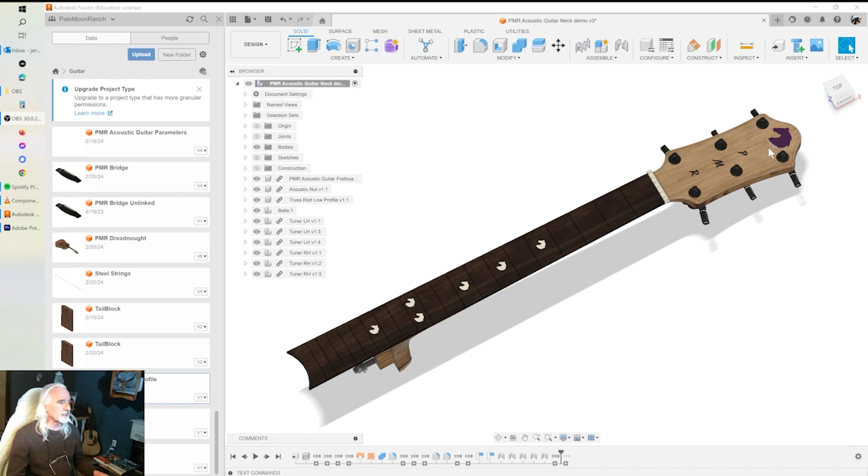In this part, we are going to finish up the neck, and that's going to include designing the headstock veneer, this layer on top. We're going to then move on to getting the heel cap put on to the heel transition. After that, we're going to sketch and then cut in the slot where the truss rod will go. Let's turn that truss rod off so we can see. So we're going to cut this so that we'll be able to bring in the truss rod and joint it into that slot.

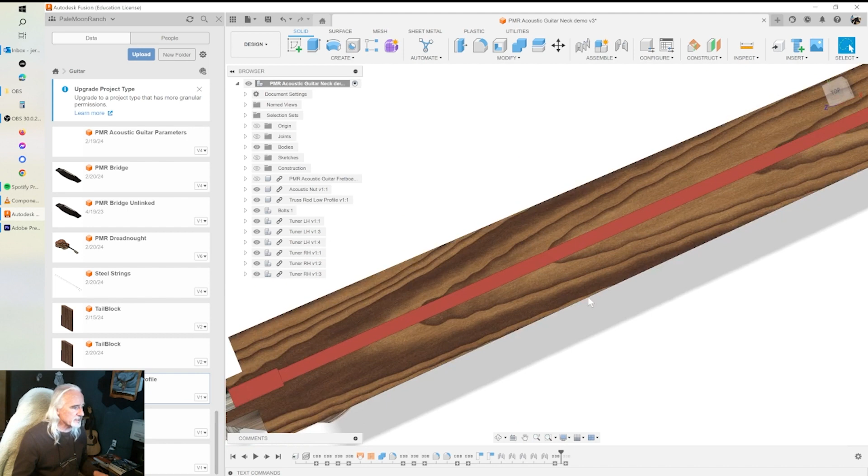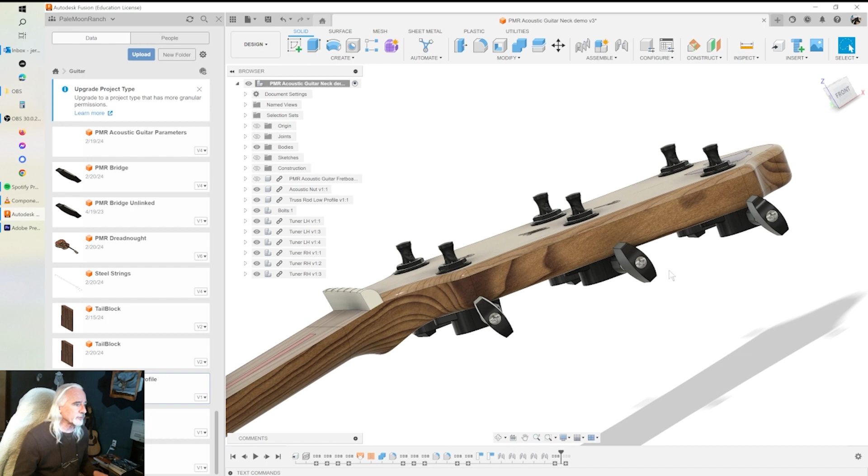Once we have that, we're going to bring in most of our components. By that I mean the hanger bolts, the washers and the nuts, the truss rod and the nut, and we're going to get those all assembled into the neck. And then lastly, we're going to bring in the tuners and get those installed into the neck. Once we have that all done, the neck will be done and we'll move on to the body. So let's get started.

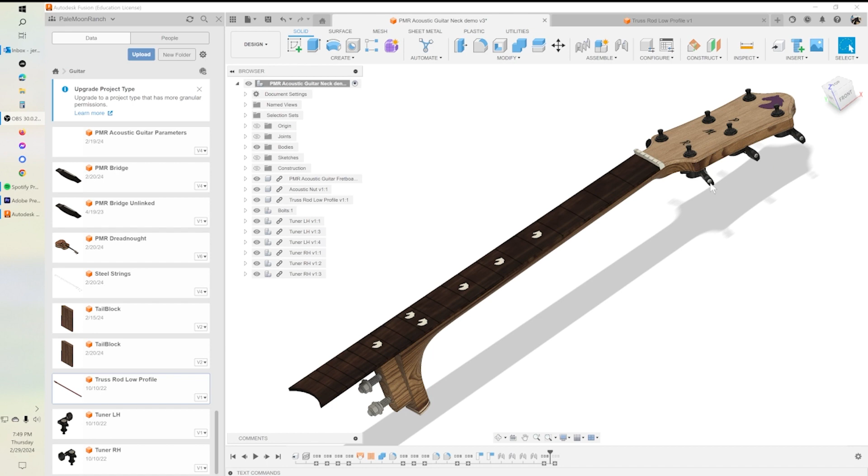First thing we're going to do is design our headstock veneer, this thin layer that goes up here. Let's back our timeline up to that and expand that. The first thing we're going to do is extrude it.

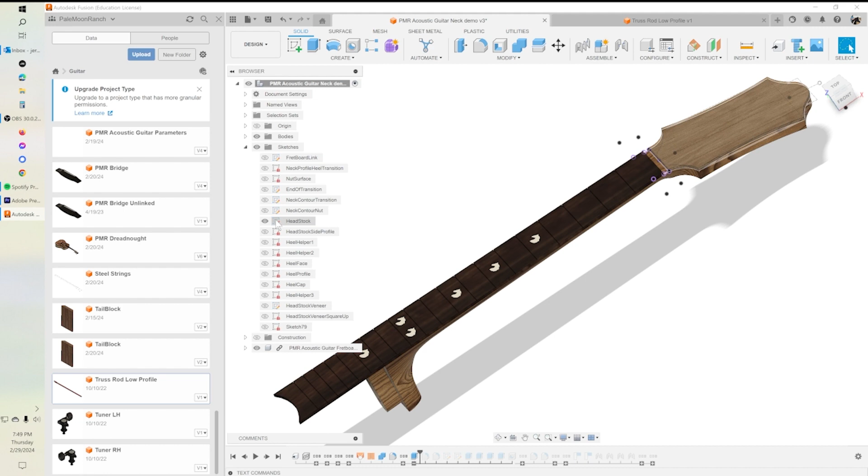So we're going to turn on our sketches and turn on our headstock sketch. And then we're going to extrude the outline of that up to where the nut goes. So that looks like this.

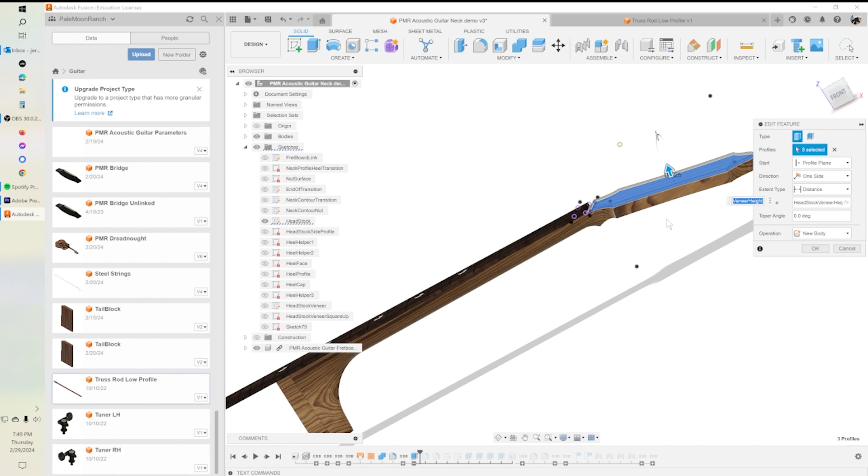And I have a parameter in here, headstock veneer height, set to 1/8 of an inch, 0.125. And we'll go to our bodies and turn that on. It is on, okay.

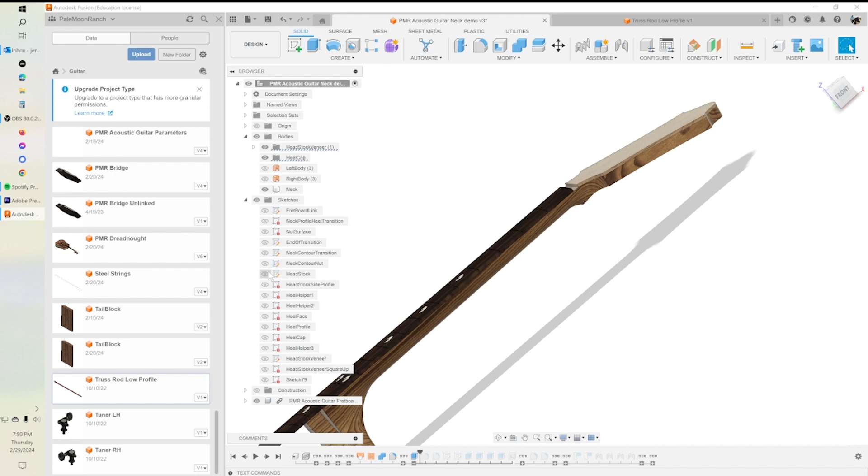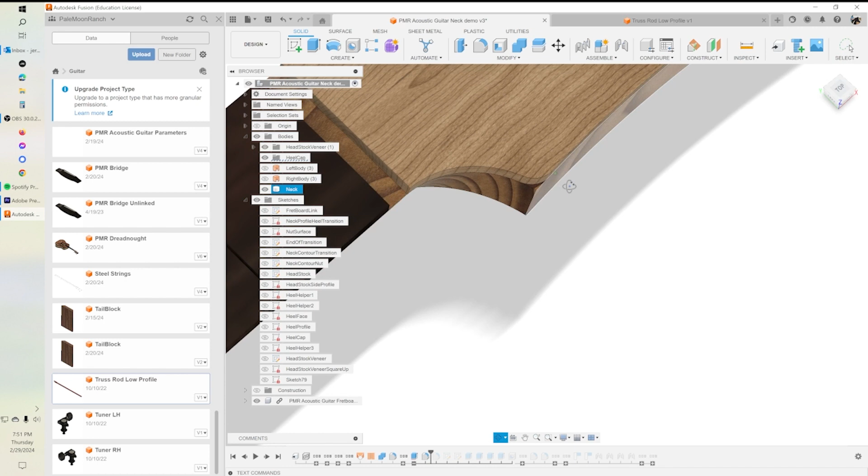Now we'll turn off our headstock sketch. Then we're going to do a couple of fillets. The first one rounds this edge here, and here, and here, and here. The second one is going to then round or fillet the top edge. We're going to fillet the bottom of this in just a little bit here.

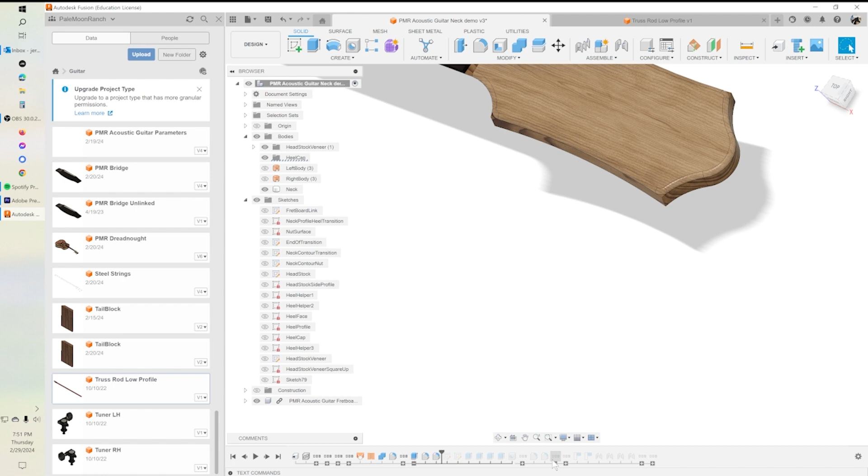So once we have that, then we need to draw our holes and our inlays, if you want to do inlays. Now, everybody's headstock is going to be a little bit different, so it's hard for me to tell you exactly how to do yours. I can tell you just roughly what I did.

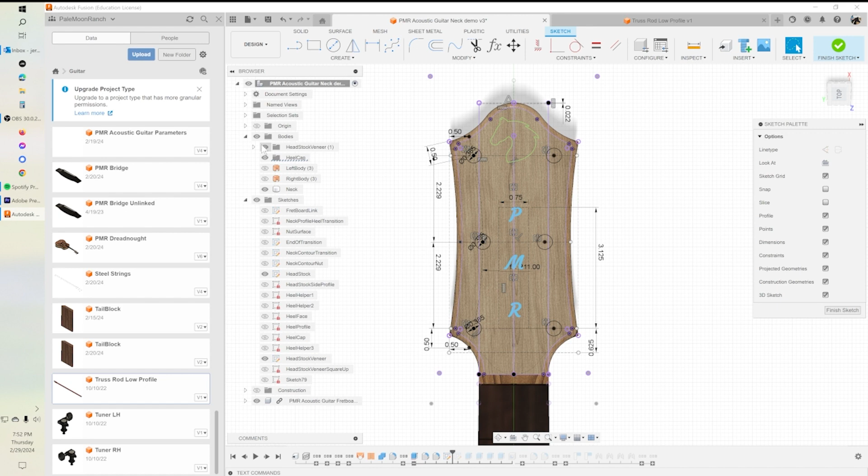Okay, so I came in here and I projected in, let's go back to that headstock sketch, turn that on, and I projected in my outline. Let's turn the body off for a minute. So I projected in this line here, not the line, but just the points - this point, this point, this point, this point, and this point. And I projected in part of our construction here.

Essentially, what it comes down to is that I created another arc here at the same radius as this outside arc, and I dimensioned it in 1/2 inch. And then I dimensioned up 1/2 inch from this point here to start my first hole. Then I just evenly spaced my holes and had them set in a 1/2 inch.

My holes are just over 3/8, a little bit bigger than the tuners, which have a 3/8 inch diameter. So these are just a little bit bigger for tolerance, 0.01.

And then once I had that, I just mirrored it over to the other side using that projected in line that I used right there. So I mirrored the opposite holes the same.

Then I brought in my SVG of my horse head, and then I just created a text box here and put in my PMR initials for Pale Moon Ranch. So that's just kind of an overview, because your design isn't going to look like my design necessarily. Almost certainly not.

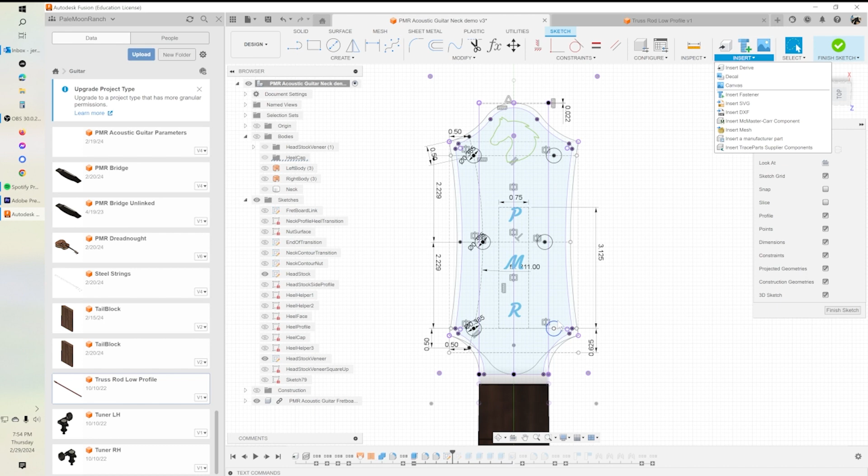Hopefully that gives you enough information. You basically just need to define where your tuners are going to go, create a hole that's slightly bigger than the tuner's diameter. They're all going to be pretty much 3/8, so 0.385 is a good number to work with there. And then put in any inlays you want.

Then once you have that, turn the bodies back on.

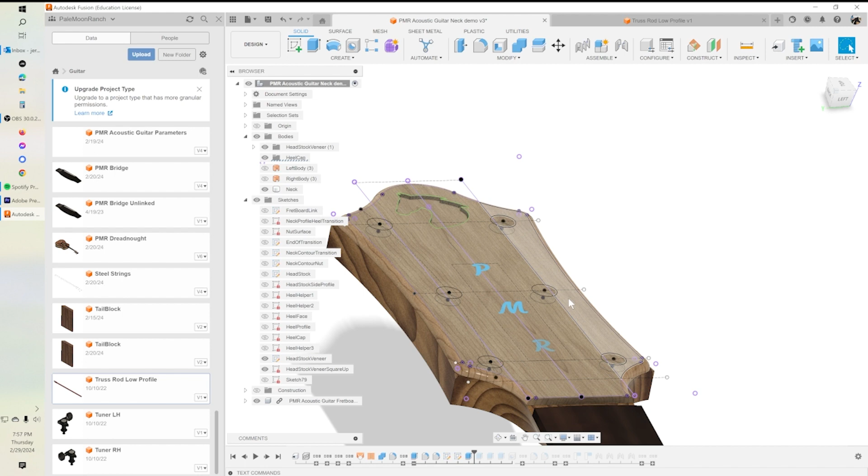So the next thing I did was cut in my horse head, and then I projected it back up with a new body for the inlay. I just created a purple paint—not sure what material I used, I used some material and then just colored it purple.

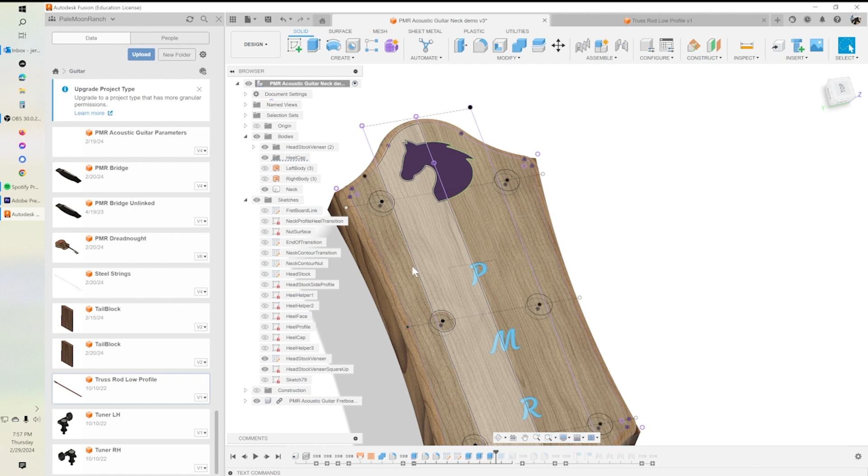Next thing I do is cut in the PMR, turn off the sketches, and again project it back up to fill it in. That's all just visual.

Then I'm going to cut my holes in. I'm just going to select my 6 holes and set my hole type to simple, hole tap type to simple, and drill point to flat, because I'm going to use my 3/8 inch or 1/4 inch flat end mill to cut those.

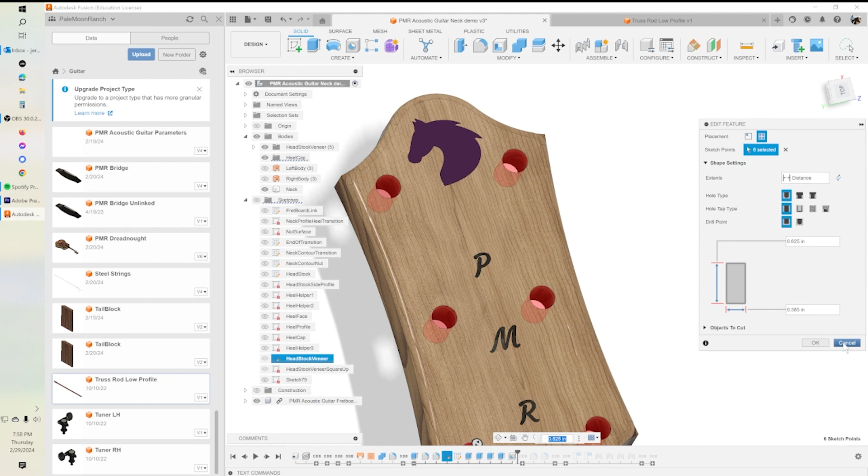And that's it for the headstock veneer.

Next thing we're going to do is create our heel cap on the bottom here. I did it as a 3-part thing because I wanted to create a lamination of two different woods, with maple, then walnut, then maple.

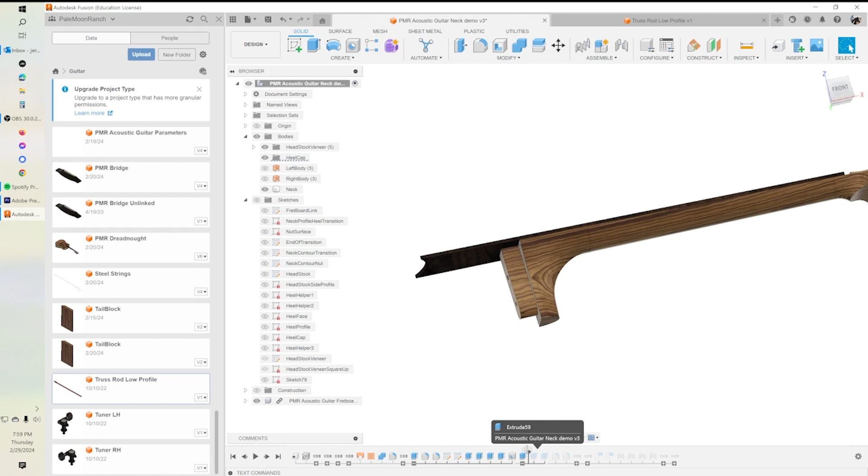So all I did was select this surface and extrude it 1/16 of an inch, and made that material maple. Then I extruded each one as a new body—another 1/16 inch of walnut as a new body, and another 1/16 inch of maple.

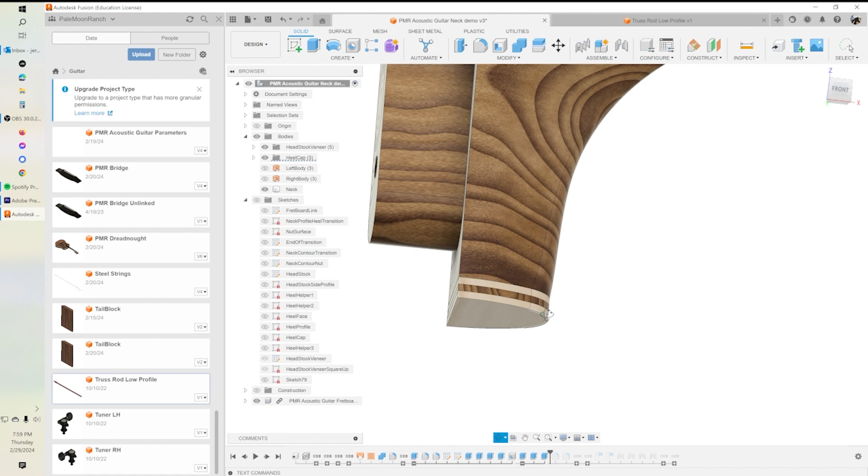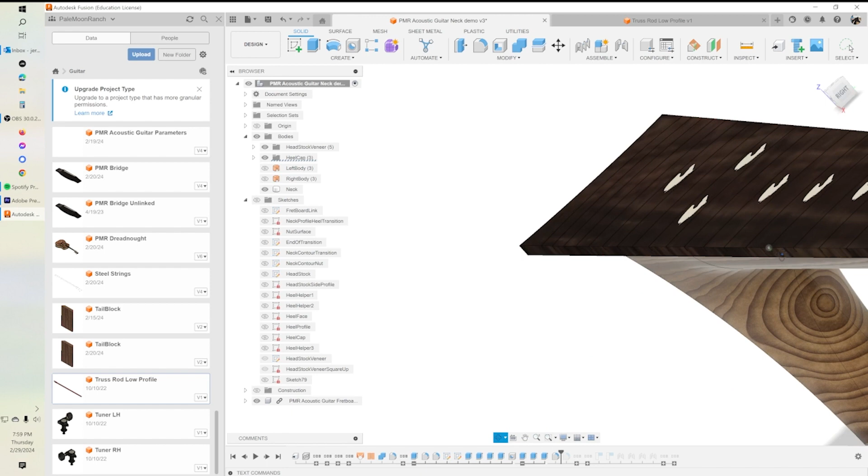Then I came back in and added a couple more fillets to match this up. The first one is to round over these corner edges to match the veneer, and then I did another one to round off the bottom.

Now, I know in part 2 we rounded this off, but that has gotten moved to here, so now we're just going to select this edge here and round it all the way around through the volute and around that bottom edge.

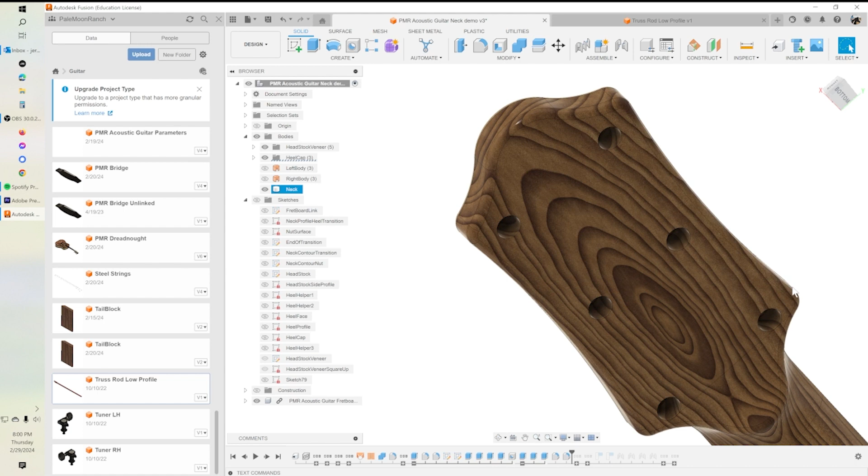Okay, so next thing we're going to do is cut in a slot for our truss rod. I'm going to turn off the fretboard—the truss rod is going to sit right in here, so we need to put in a slot for it. The truss rod I use is the low profile truss rod from StewMac.

So I created this model of it. It's not a working model—it doesn't actually have any function in here. It's simply here to model it in the guitar, an aesthetic thing just to show that it's there.

It's on my GrabCAD account, so you can go pull this down—I'll put a link to my GrabCAD. I have several things I modeled that I use in this guitar, like the nut, the bridge, the saddle, the strings, the frets, this truss rod. I'm not sure what else I might have on there as a GrabCAD item.

And these things are just to make the model complete for visual effect, really. So what we need to create a slot for this—as you can see, this part of the body is a different dimension than this. So what we need to do is cut in a rectangular block that matches this.

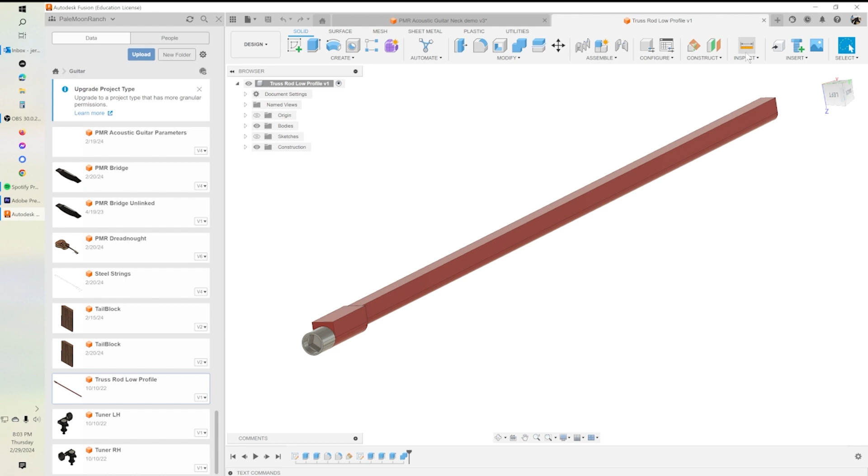Then the other dimension we need is this dimension across here, which is 1/4 of an inch. And we need the length of this section of the body, so we're going to grab this and go to here—that's 12.75. So we have all those numbers.

So we'll go back over here, and we're going to create a sketch on this plane.

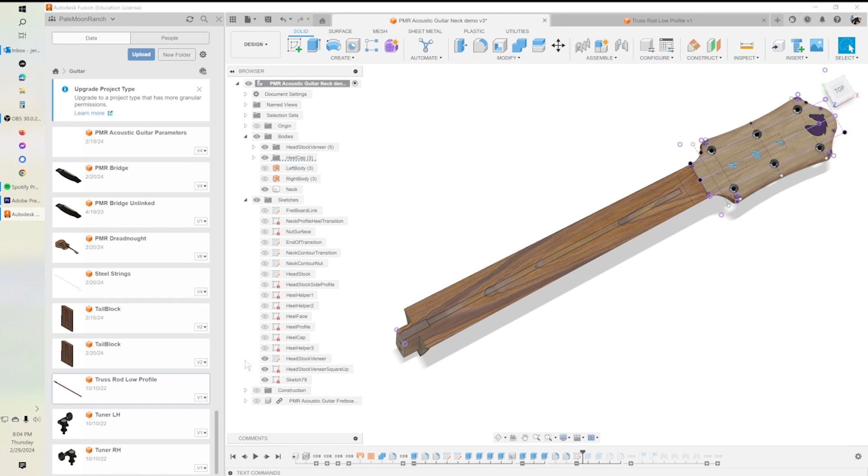So we're going to create a rectangle on the end here that's coincident to this end and midpoint, that is 3/8 wide and 1 3/8 inch deep.

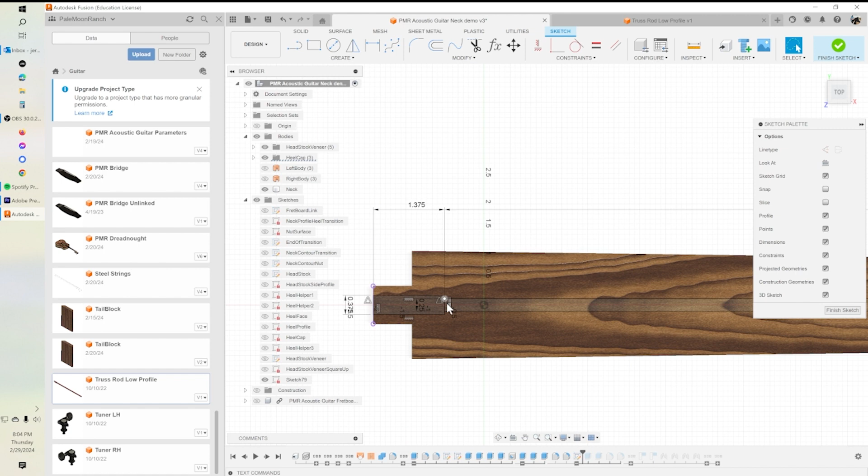Then we're going to create a 1/4 inch wide by 12.75 slot that goes directly behind it, and it's going to be constrained to the midpoint again of the neck.

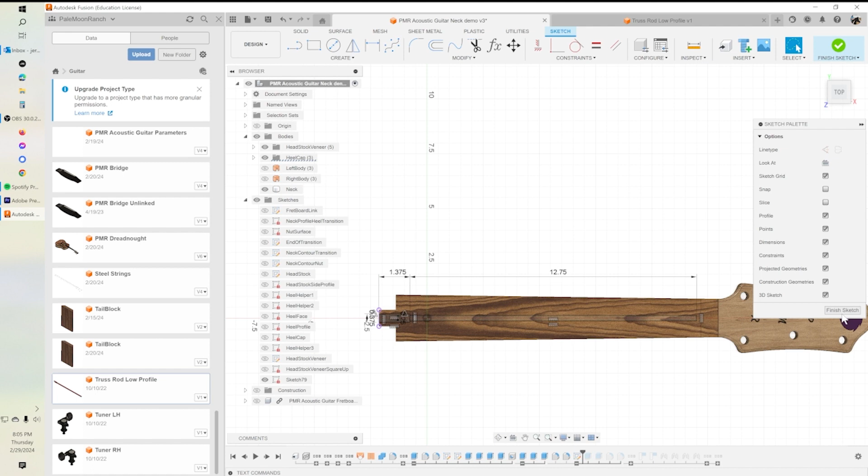You see all the parallel, horizontal, and vertical constraints, and that's all there is. So once we have that sketch, we're going to extrude that. First this one.

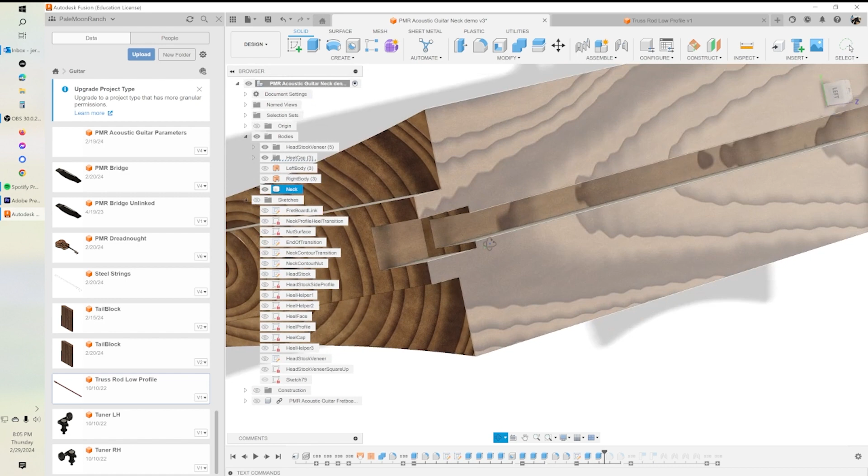Then we're going to extrude the other channel. Go ahead and turn off our sketch so you can see that. And then we want to fillet the bottom so it matches the curvature of the truss rod. So we're going to fillet this one and then fillet this one. And there we have it.

So in a little while we'll come in and bring in that truss rod, and we'll create a joint to set it into that slot.

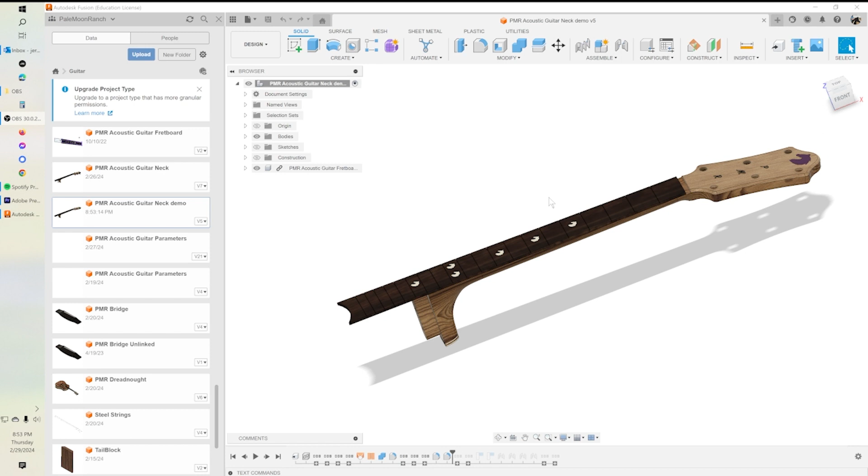Another way to cut that truss rod slot, if you actually have a model of the truss like I do here, would be to simply bring that truss rod in. Let's grab that. Bring it in as a component here.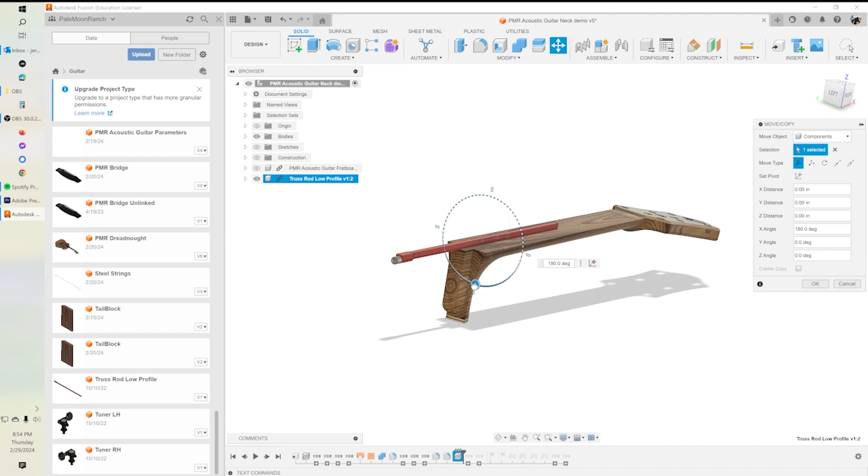And then move it into place carefully, make sure it's exactly aligned. So let's flip this over 180 degrees right there. And then if we zoom in here... let's say okay and zoom in.

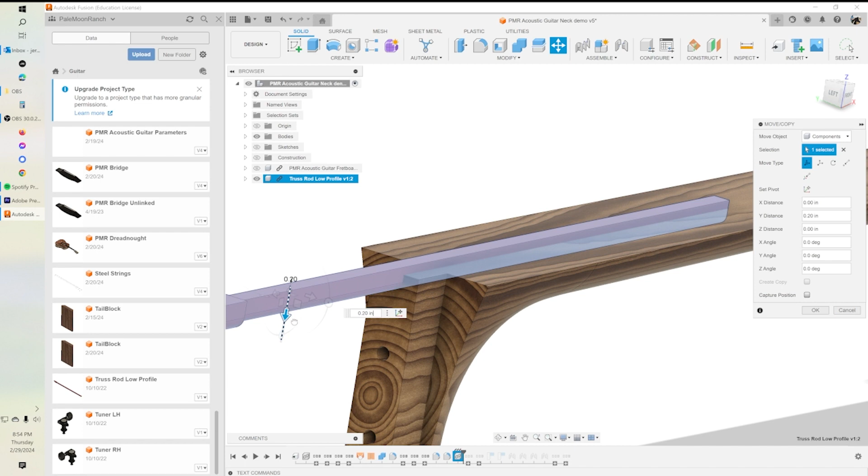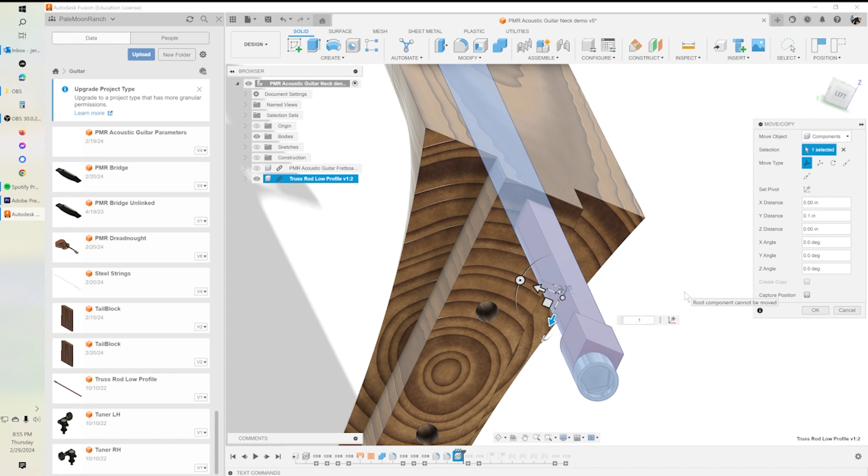It's a little bit too much, so let's go back to move, and we need to come back up just a hair, maybe 0.1, actually 0.01. There, maybe that did it. Okay, we're there, it looks flush with the top.

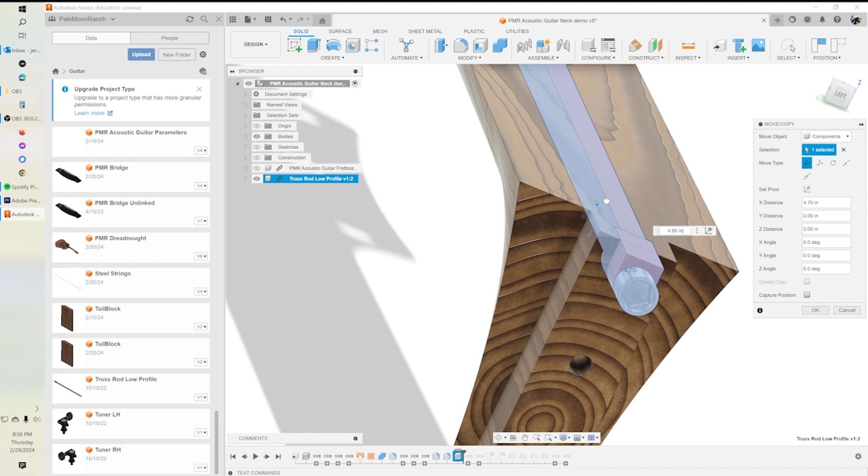And then we're going to move it back until it's flush with the end. Let's get this thing turned around so we can see. And it needs to go back still. Let's say 6, what is it? 1, 2. There, and that looks pretty good, huh?

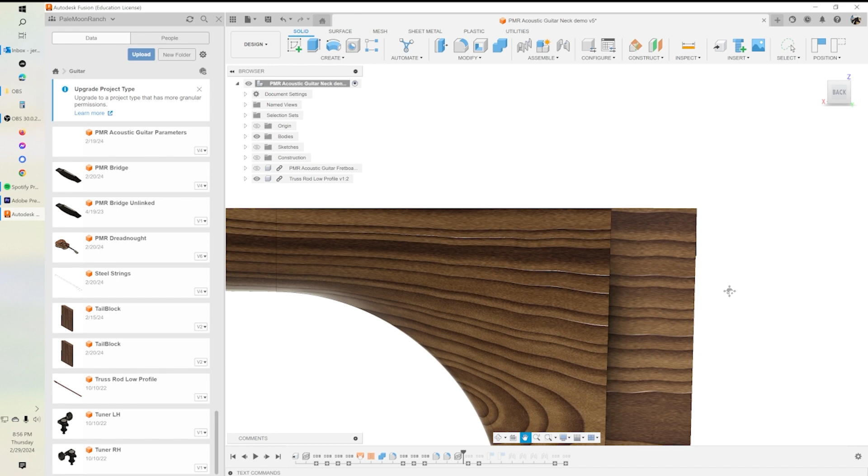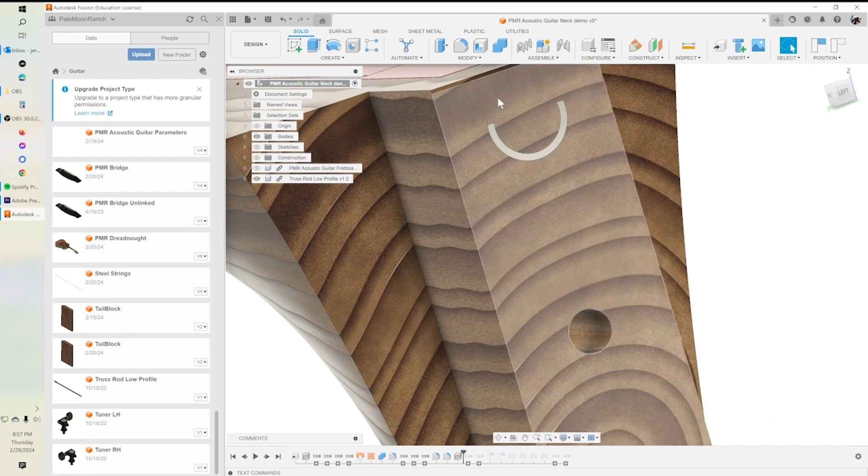And we can tell, if we can actually see it, that it's there. Maybe it's just a little bit too far, so we're going to go back to move again and bring it out just a tiny bit. The reason it's like this is because, remember, we've got an angled neck here. So we're going to bring it out just a little bit more to take care of that, because we need to cut through the whole thing.

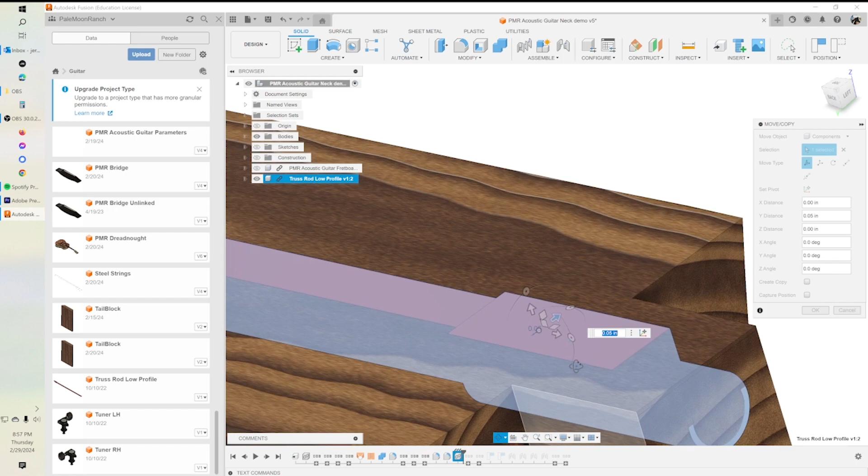So let's get up here and grab this, and we want to come out. We're going to say 0.05, and that'll do it.

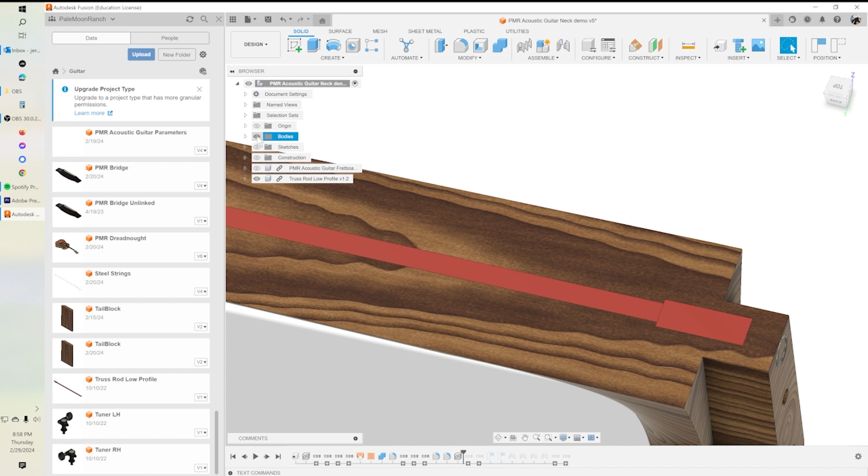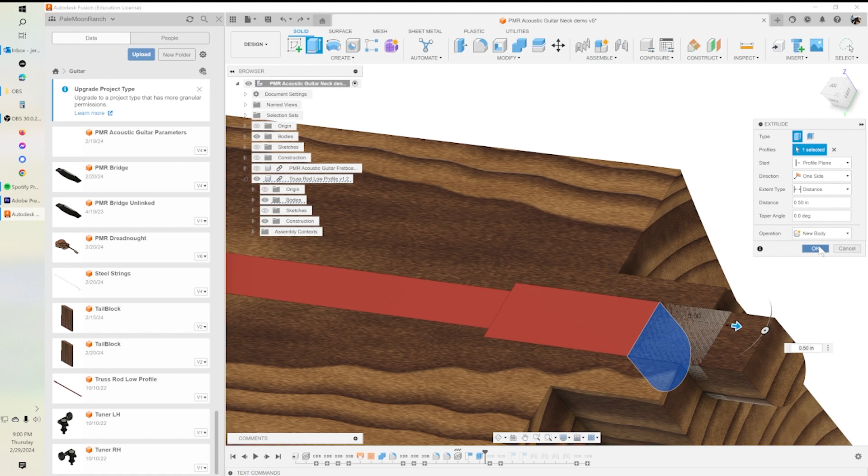All right, so then what we're going to do is extrude this out. I'm going to turn off the neck bodies for a minute, just like that. Extrude it, and we're going to say new body. And turn on our bodies over here. We're going to say new body. Say OK. Okay, now let's see if this works.

Now we're going to do a combine, and we're going to select our target body. And our tool is going to be this, this, this. That's enough right there. And we're going to do a cut operation.

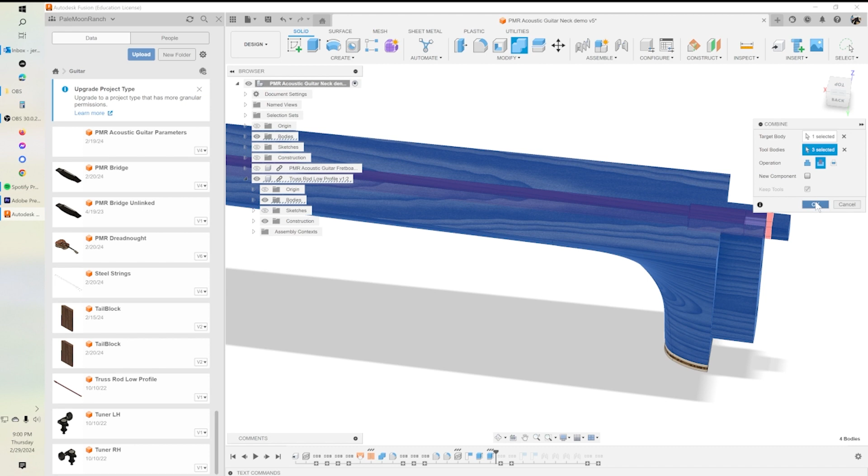Now if we turn off our truss and we turn off that body we created there, and that one, there we have our cut-in slot for the truss. So that's just another way of doing it.

Okay, we got that. Next thing we're going to do is bring in our components, starting with a hanger bolt and a washer, a lock washer, and we'll go ahead and create a rigid joint to put that onto the bolt.

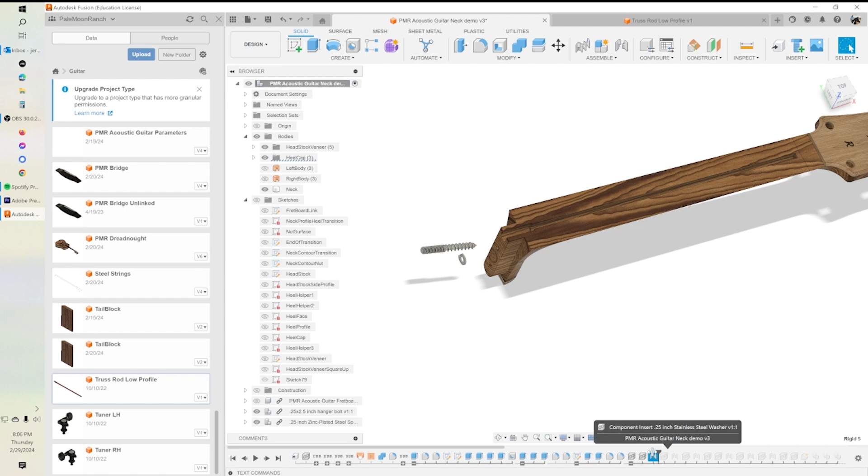I'm not going to do a tutorial on joints here. All of this—anybody that's done joints knows they're a pain in the butt, but...

Basically I'm going to take the center of that washer and do a joint to the center of the bolt, and then I'm going to offset it within the joint to bring it up on the neck there. So you can see the offset is 1/8 of an inch.

Then I'm going to bring in a flat washer, and I'm going to joint that onto there. And then I'm going to bring in a nut, and I'm going to put that on there with the joint.

Okay, and then I'm going to do that all over again for the second one. We'll just jump ahead here.

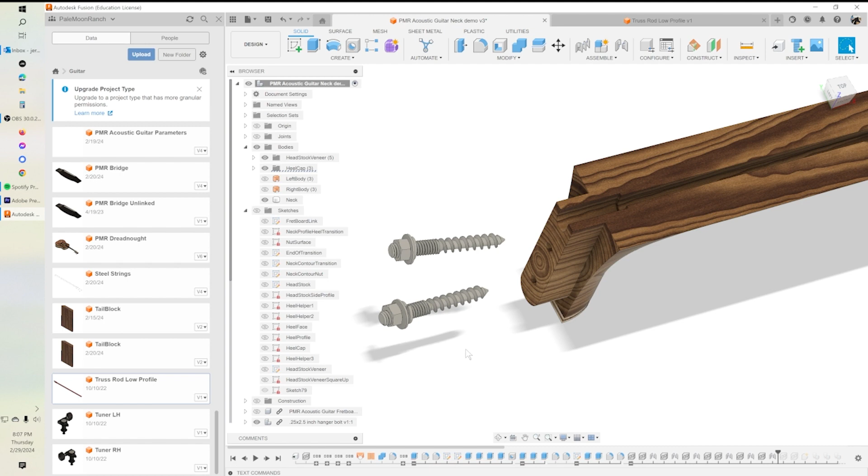And we have that. I should have explained earlier, the hanger bolt and the washers and nut

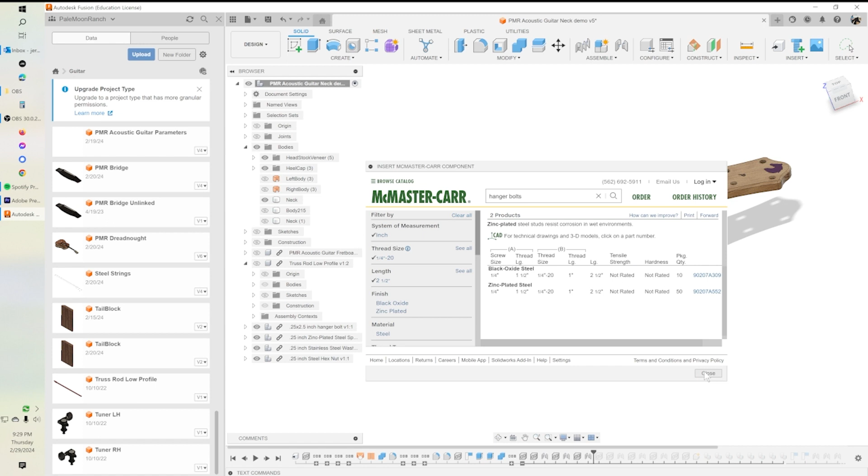Came from McMaster Carr. To get those, we go to Insert McMaster Carr Component. We're going to get this up and search for what we're looking for. Let's look for a hanger bolt. Hanger bolts right here.

We're going to choose, we want inch, steel wood screw threaded studs. So we're going to select that. We're going to choose 1/4-20s, and we want them 2.5 inch, and that narrows it down to what I want. And I want the zinc plated steel right here, 2.5 inch.

So I'm going to select that, and then that pops up this down here to where I can download the CAD for it. You can choose what you want here, and what we want is a 3D step file. So we'll select that and click download.

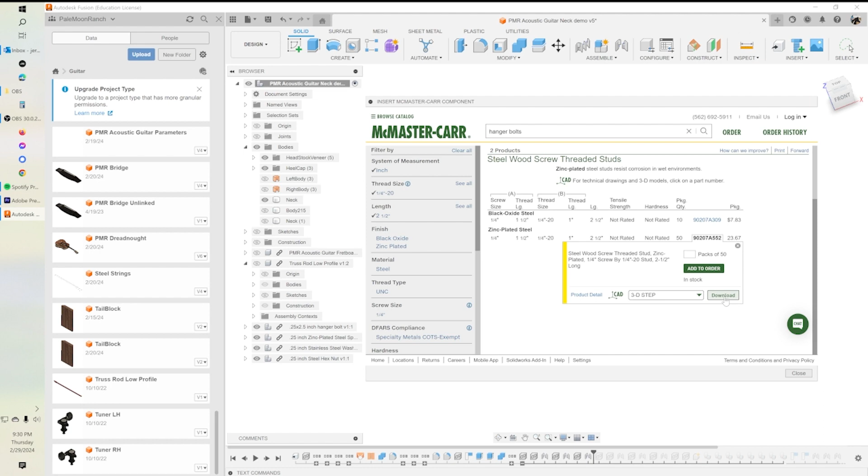Now bring it back into our model. Brings it in here, and then we can orient it and place it where we want to, and say OK and accept it. And it adds it down here as a component.

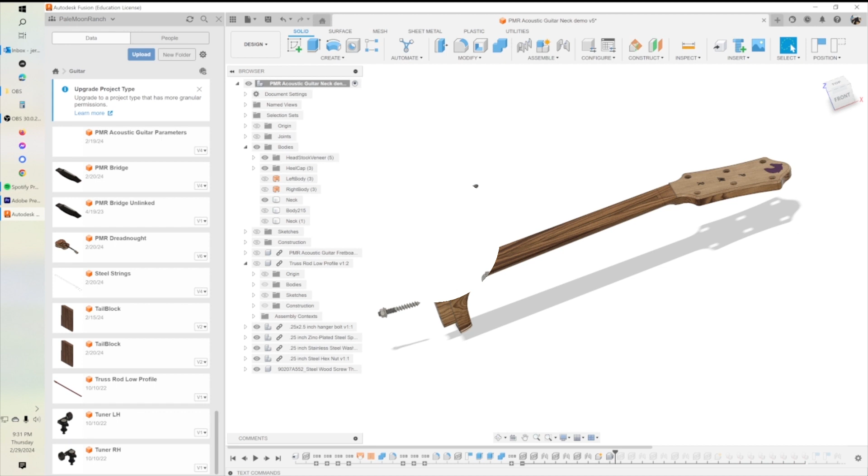Okay, just wanted to show that. And we'll join those to the neck here in a little bit. First, we're going to go ahead and bring in our truss rod and our nut.

So we've got our nut, and again, that nut is on my GrabCAD. You can go pull mine down for the purposes of modeling, and you can pull down my truss rod if you like. Of course, if you plan on using a different truss rod, you can design your own. I don't know of any other models out there you can pull down of a truss rod. Even a nut, I'm not sure you can find the nut.

Of course, these are dimensioned to the dimensions I chose. I believe this is 1 3/4 inch up here, and that nut is dimensioned for that. Sorry, it's 1.5 inches.

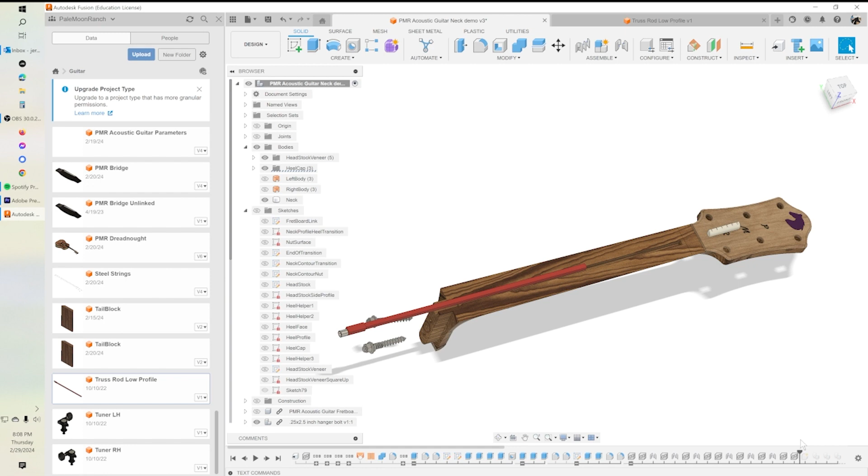Okay, so once we have those, I'm going to take a quick departure here. I've got all of these nuts and bolts here that I just pulled in. I want to organize them, so I'm going to create a component here and call it bolts, and then I'm going to cut and paste all of those nuts and bolts and put them into this component.

So that's what this is down here, is moving all those. I just want to be able to pull them in there just to organize them. Then I can kind of close this up and have less distraction, I guess, is what it comes down to.

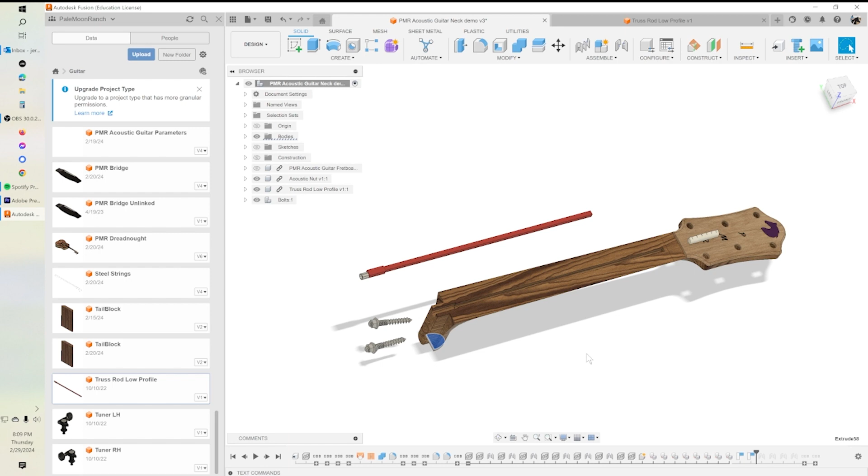Let's close down some of these groups to give us some room on the timeline. These two positions are just to get things moved so that I can get some joints on them. So I move that up there. Then I'm going to put a joint. Let's turn on our joints, actually.

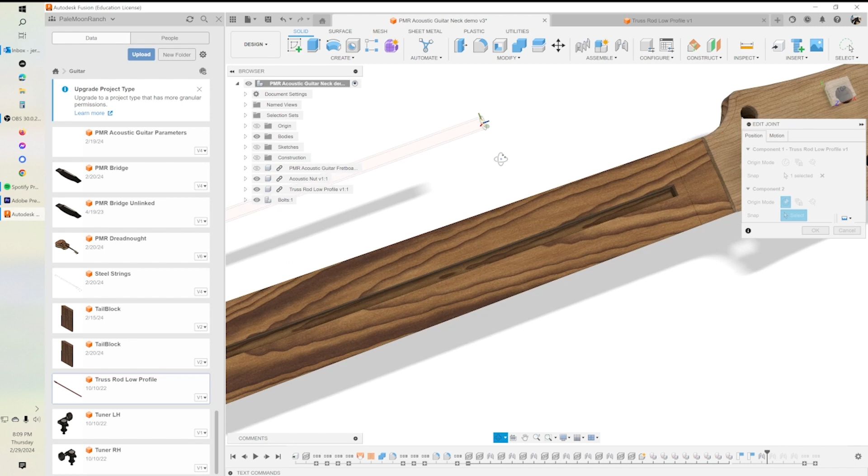Just a rigid joint, the face of this against the face of this. Undo this so you can see I chose the end of this, the center of it, and then for my other side I chose just the center here. Okay, and that dropped that in there and locked it into place.

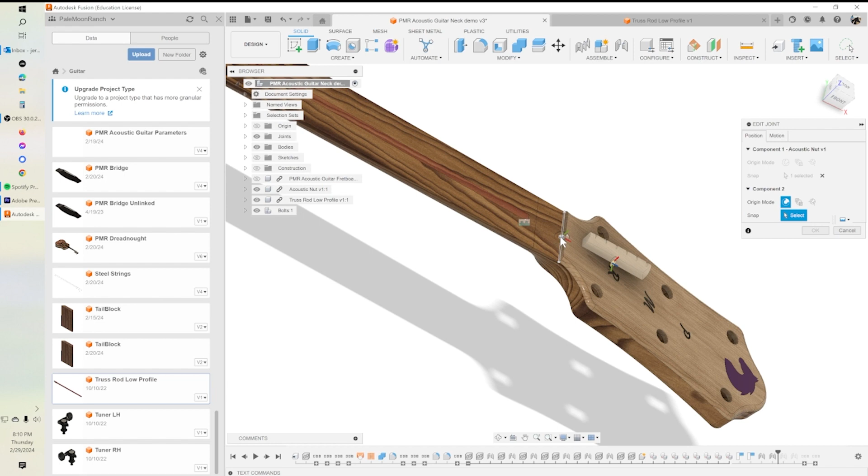Then I want to get my nut placed, so I'm going to go ahead and create a joint for that. Click OK on that, and I'm going to create this joint here to place the nut. If we want to look at that, we can. Let's delete this one. So I chose the back edge, but on that plane. And then I chose this same thing here on this line, but down in the bottom, right there, and put that nut right there. Okay?

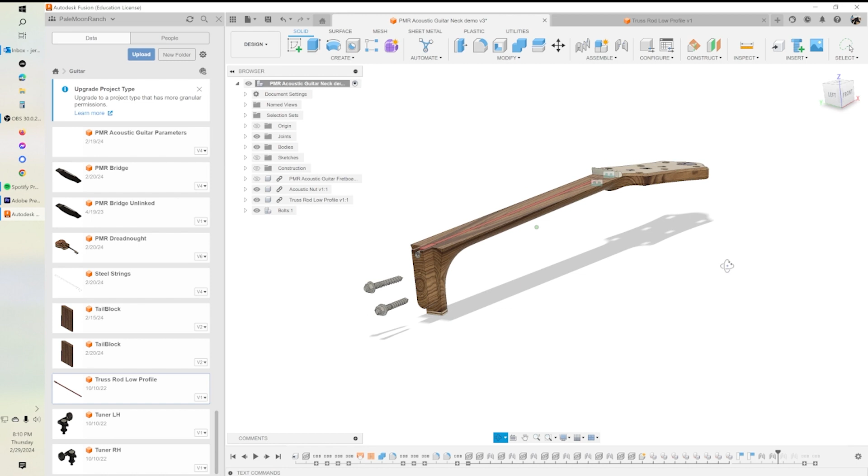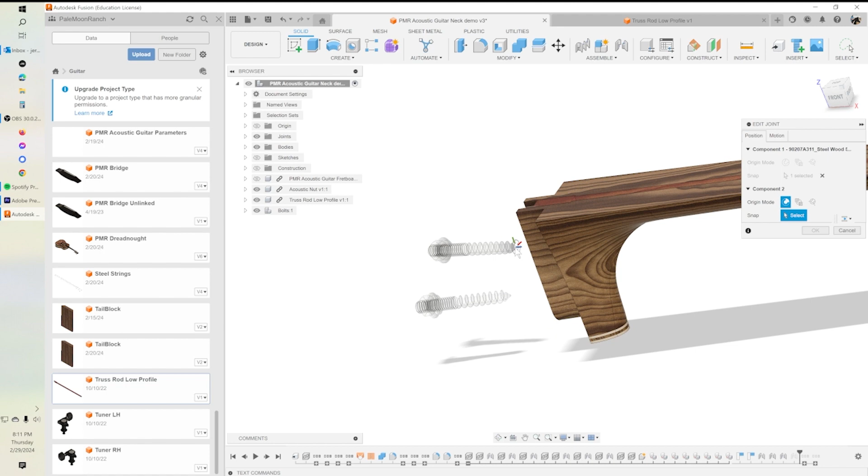And then we're going to go ahead and put these. Now I put revolutes on these just because I was learning how to use joints and messing around. There's really no point in putting a revolute joint on these. Just a rigid would be fine. And again, it's just choosing the... I chose the very tip of this bolt for my first, and then I chose the bottom of this hole, making sure we get down inside, not the outside, but down inside, to put that in there like that.

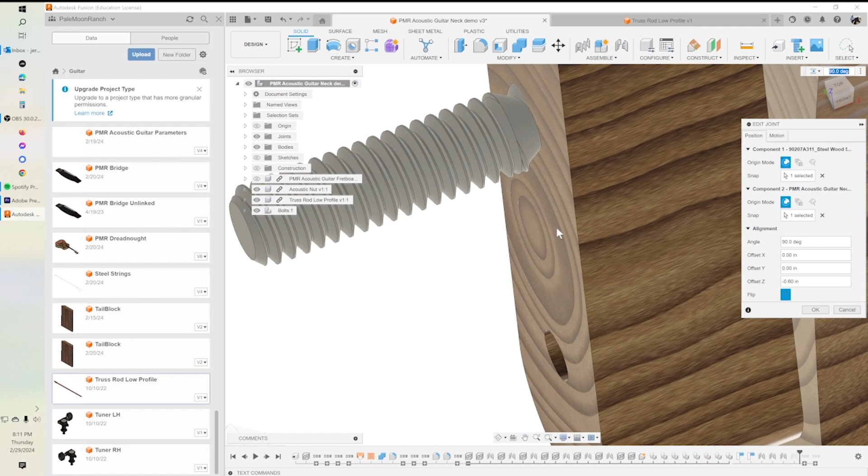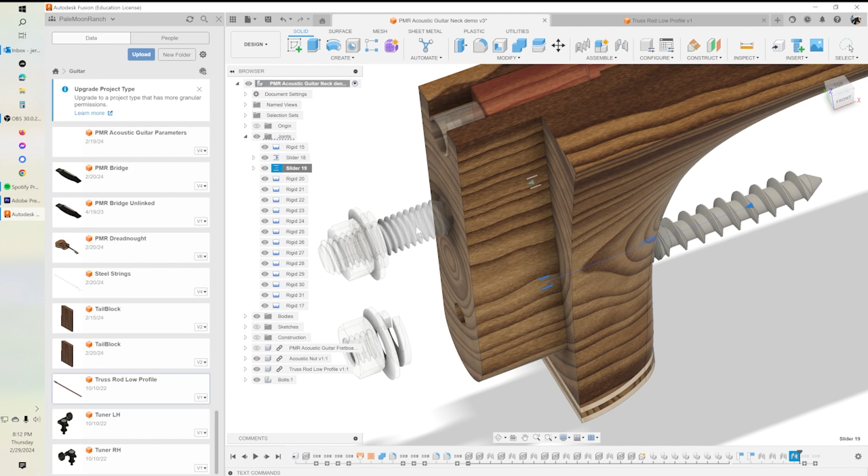And then when I click OK, these are already jointed to it, so they came with it. And like I said, I have a Slider. I was just messing around. I really don't recommend you do that. There's really no benefit to it. But it makes it do silly things like that. There's no point. Okay, so let's stop that.

And then the last thing we're going to do is bring in our tuners. I did not create these tuners. It's one of the few things I didn't model myself. I just went out to GrabCAD and brought in my tuners. I couldn't even tell you at this point which tuners I grabbed. So you grab whatever, and the jointing on them might work differently than it does with these.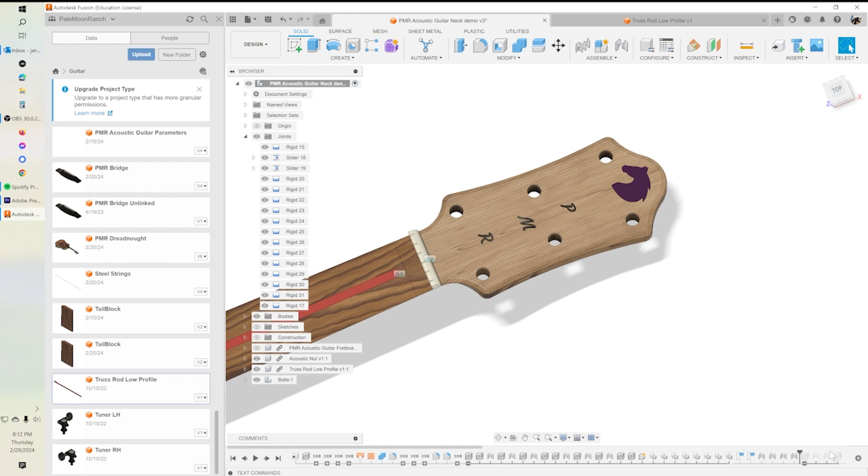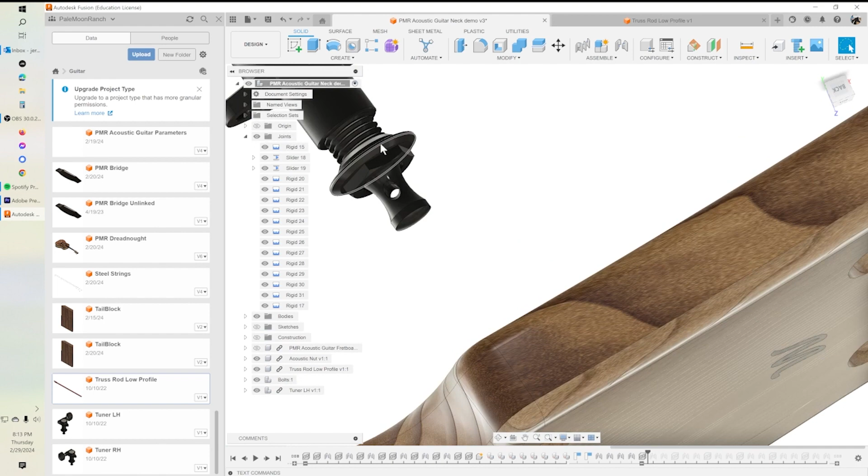I'll show you what I did, and then basically you'd have to figure out your jointing with yours. So I bring in a tuner, and this little cap needs to go on top. For some reason when I do the joint, it takes the nut right here but leaves this, so I have to do two joints. First I joint the main body.

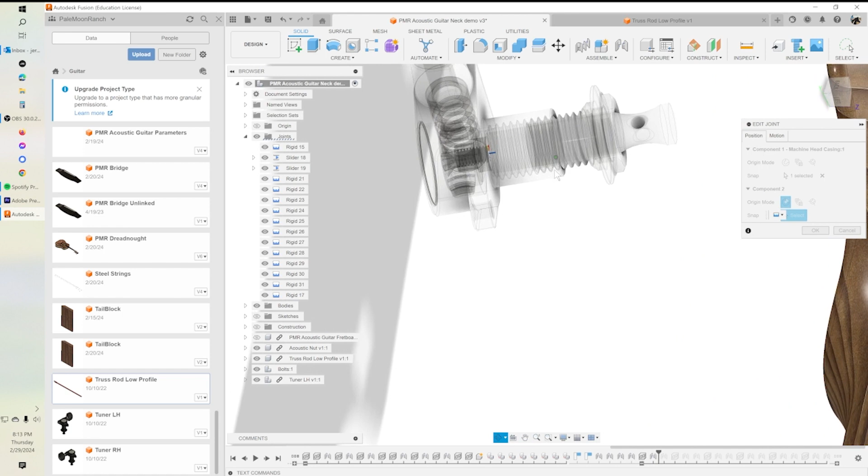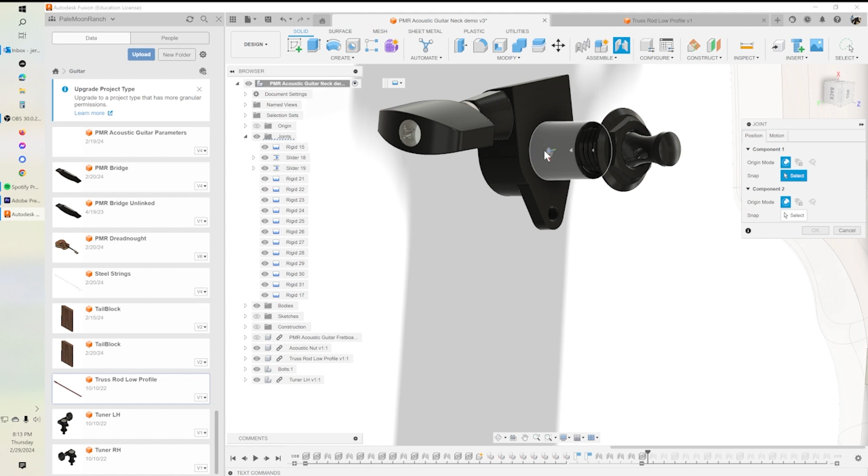And what that looks like is something like this. Kill that one so I can show you. I've selected, and I'm gonna back up and just do the joint over so you can see, because you got to grab that. You want this surface to match this surface. So I'm gonna grab this. Let's do assemble joint, and I'm going to grab that point right down there at the base of that column.

Okay. And then I'm going to place it. I want to place it on this center of that circle, but on the surface, not down inside. Now, for whatever reason, it's leaving it up a little bit, so I've got to drag it up until it touches—it's a 1/10 of an inch. And then I don't want this hanging over, so I'm going to use the rotate, and rotate that around to where I want it to be.

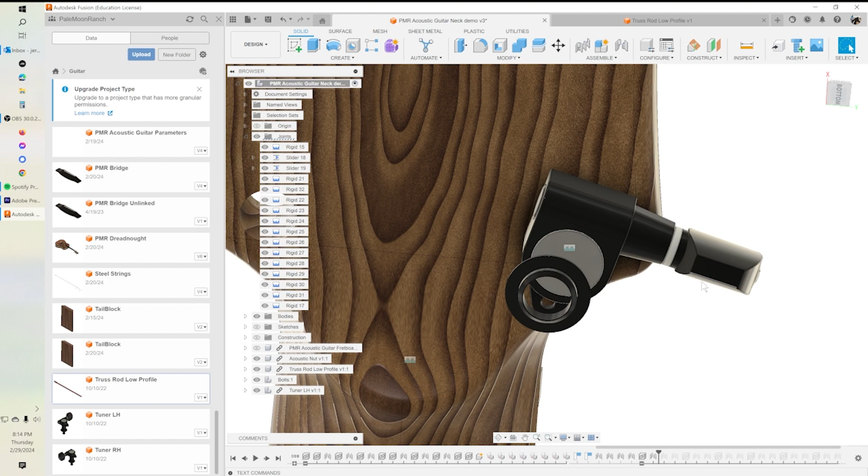Okay. And when I click OK, it'll bring the rest of this with it, but it leaves this behind, like I said, so I've got to do another joint. I just choose, I want this to go in this hole. So I'm going to choose this surface right here, assemble joint. I want the outside edge, not the inside, right there, just like that.

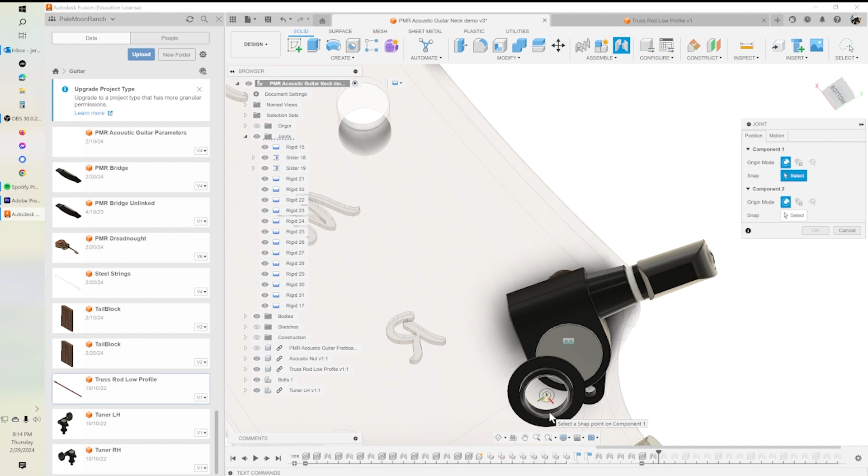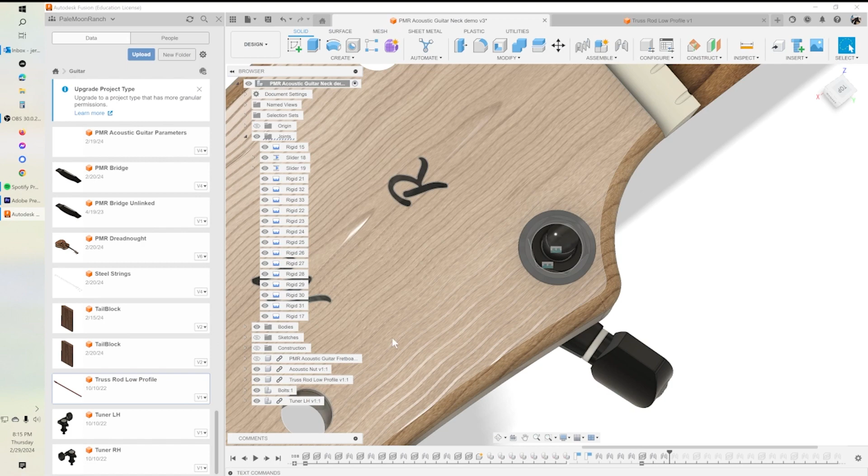And then I'm going to come up here. I'm going to turn off the tuner so I can see, and choose the top of this hole. Turn it here so I can get it right there. Did that work? Oh yeah, because I have it turned off. So you see that cap's now where I want it to be, right there.

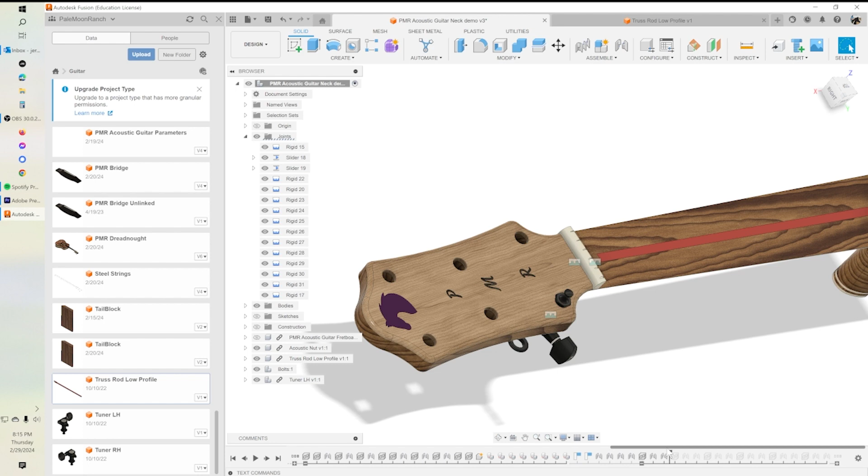Okay, and then we're just going to do that again 6 times. We're going to, let me get rid of these. Let me undo those joints. Then we're going to pop up here, and there's our joints. Something broke, don't know what I did. Okay.

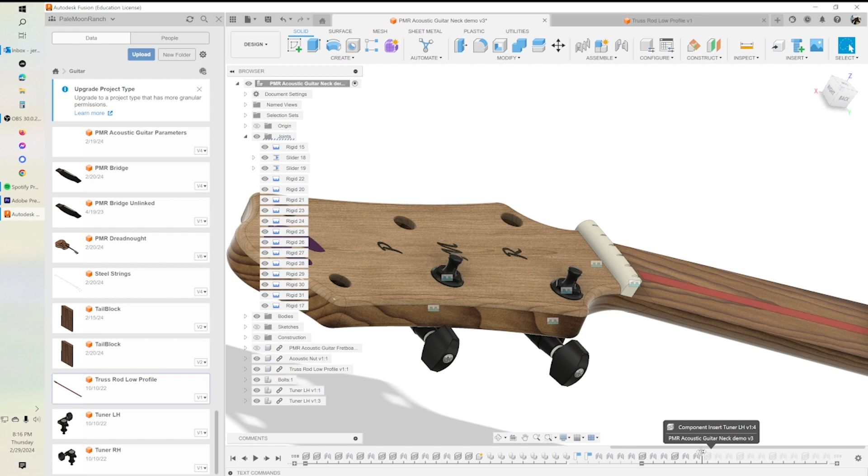Okay, so then we're going to do that 5 more times. We're just going to bring in 5 more. Just jump all the way to the end. Okay.

And then that's it. Last thing I have in here is to create some stock. When you actually get ready, I'll cover that when I go through the actual machining, all the cam work that I'm going to do later.

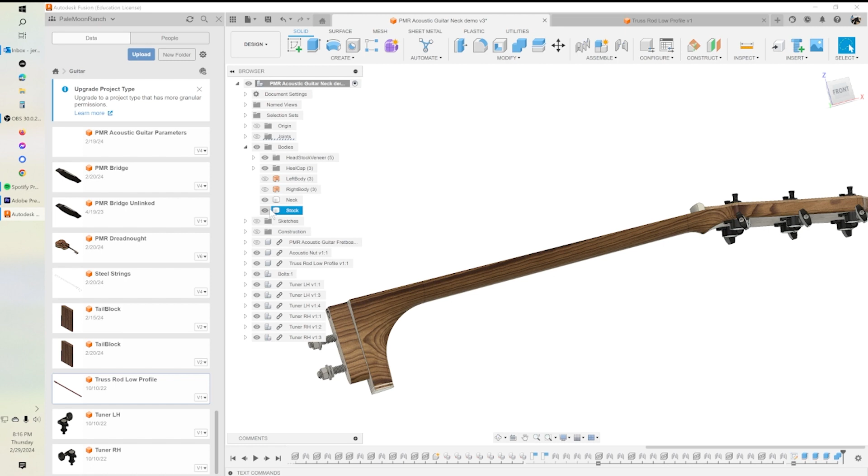I can show you briefly that I'm just modeling what stock might look like. Let's close that, turn this, and we'll turn on the stock. Just messing around. I don't know what my actual stock will look like when I get ready to cut this, but this is what I modeled for, so when I go to cam, this is what it might look like. Or it might be a solid block, I don't really know.

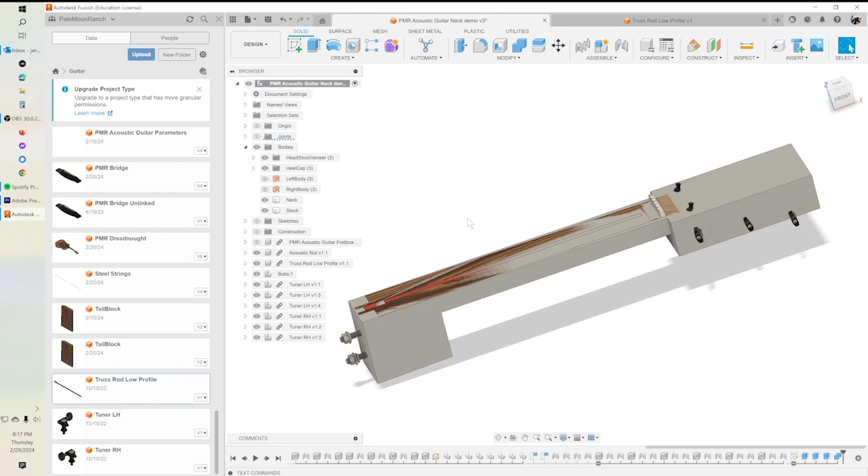So that's kind of it for the neck. The neck is complete. We'll turn back on our fretboard, and we're ready to start modeling the body. And then later we'll joint this to the body. Okay, so see you on the next section.

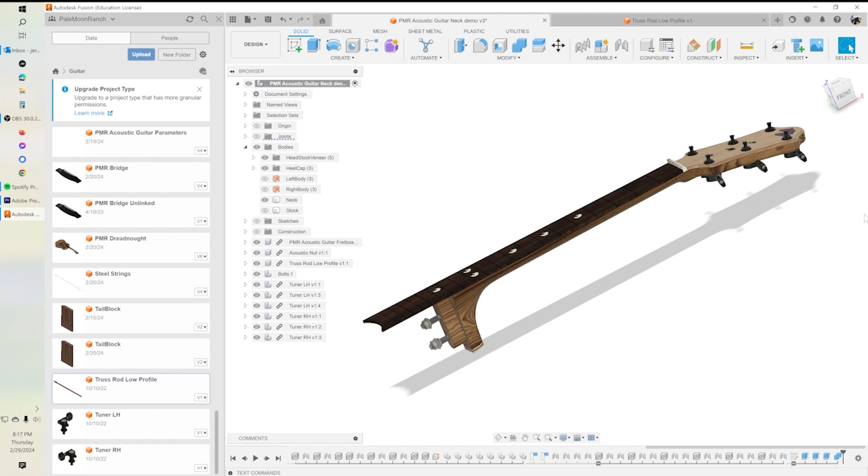So that's it for this part. We got a complete neck. We're going to move on to the body. Next up is designing the radius top and radius bottom. So stay tuned.